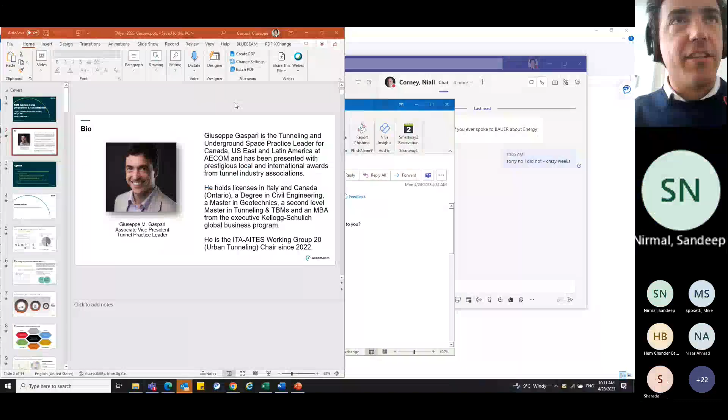This was a massive introduction. Thank you very much for it. But I hope I can live up to what you said. Thanks a lot for the invite. I'm always happy every year to come back to India digitally. I spent 5 years of my life between Bangalore, Delhi, and Mumbai, so India stays in my heart all the time.

So let's get started. Today I want to try to identify some of the case histories that apply best to some of the recent work we're doing in the International Tunneling Association around the value proposition of TBM tunnels and their sustainability aspects.

Let me try to go into presentation mode and confirm if you can see the full screen. Let me minimize this. So you already introduced myself.

Let's not waste time. The agenda for today, I hope I can cover it all, starts from an understanding of the value proposition of tunneling. We will work into some thematic case histories, in particular facing geological and geotechnical challenges, which is always the first point. We will look at examples of how to mitigate impact on existing structures, existing and future solutions about break-in and break-out, and then some unforeseen accidents that I'd like to show.

So please do not record. Oh no, you're recording this meeting? Yes sir, but it's okay.

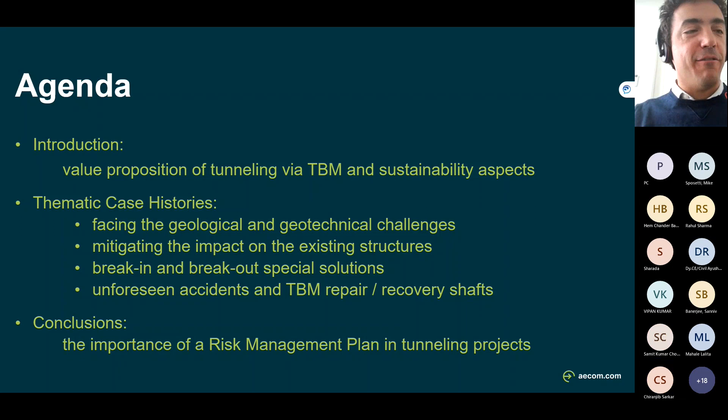Recording is on, I'll moderate my language then. This video will also be available on the YouTube channel. No problem, that's fantastic, thank you for confirming that. It's always good to learn about those experiences.

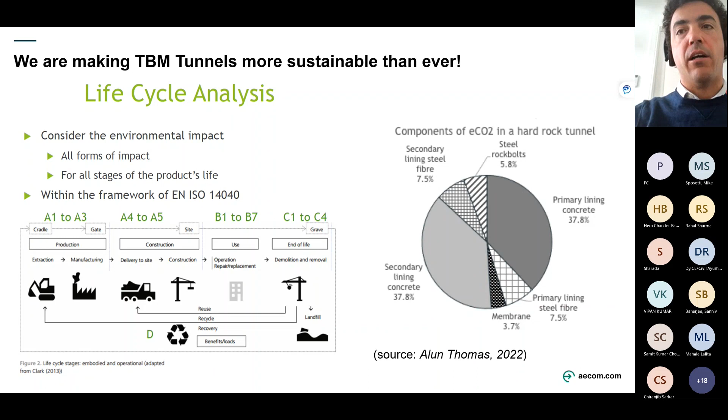In general, there have been studies and reports, some by Alun Thomas presented last year as part of our International Tunneling Association World Tunnel Congress, that look at the life cycle analysis for the sustainability of TBM tunnels. The good news is there's a lot of action going on, particularly between production and construction, to reduce the carbon footprint of materials and operations in our tunnels. As you may notice, concrete, either secondary or primary lining, is the biggest element introducing carbon issues in our project, and acting on that is our target to try to reduce the carbon footprint of our tunnels.

As a kind of test run in Working Group 20, together with the ITA Tech committee, we have taken the studies from Alun Thomas and moved to a group currently analyzing the impact of adjusting the design of some of our tunnels to reduce the impact of concrete using different types of fibers. You may notice the concrete is still the biggest element, but if you start moving from rebar to steel fibers to microsynthetic fibers, you may obtain a reduction of the overall carbon footprint and even an increase of durability.

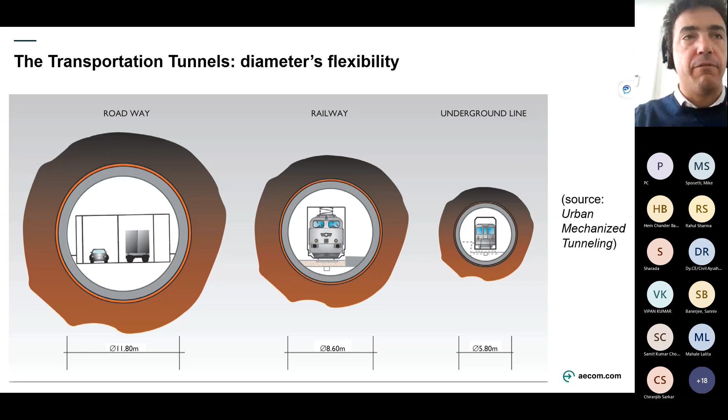Now, the next target is to try to reduce the concrete amount itself, and there are some design solutions that can help with this. In terms of value proposition, tunnels host several elements - roadways, railways, or underground lines - different diameters for different types of use. That is pretty well known.

But what is currently not well framed is the risk matrix around the overall lifetime of those tunnels. I try to identify here some developing frameworks from organization and governance, which establish the planning of a tunnel, into the procurement through supplier versus buyer power, and then the economical impact of those projects that sometimes can be delayed, leading to escalations, and sometimes may have side issues or unforeseen risks dealing with contingency. Finally, the aspect we usually work more on is execution - investigation, design, and construction itself.

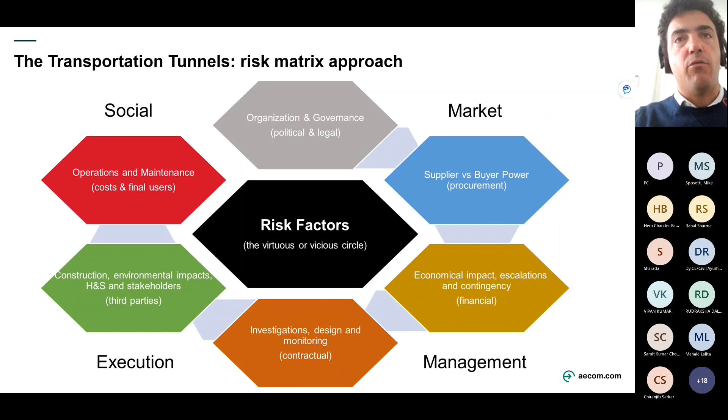And finally, the operation and maintenance. So if you try to frame your project within those different phases, and at the same time those macro areas - I divided it into 4 corners: market, management, execution, and social aspects - you may actually have a better organization of the overall risks and opportunities to consider when working on a tunneling project.

Moving into some interesting examples, one developed years ago in Canada is this Southeast Collector. A thorough study in 2003 was already conducted as part of the environmental assessment on the carbon footprint of those tunnels.

Particularly, what was calculated is not only the negative impact of construction, but also the positive impact that may rebalance the carbon footprint through the advantages of better dealing with all the CSO water in this area. So it's quite interesting to always consider those elements in a holistic approach.

In that case, a comparison between different cost items was run, along with identification of the solution that was faster and cheaper, while also considering less environmental impact. So you may notice here an open cut or cut and cover compared with TBM tunneling.

TBM tunneling was preferred at the end of the game, not only because it represented a less risky construction method at some locations, particularly where we got to underpass highways or railways, but particularly due to considerations of less environmental impact. As we all know, an open cut may be more dangerous also for the local environment.

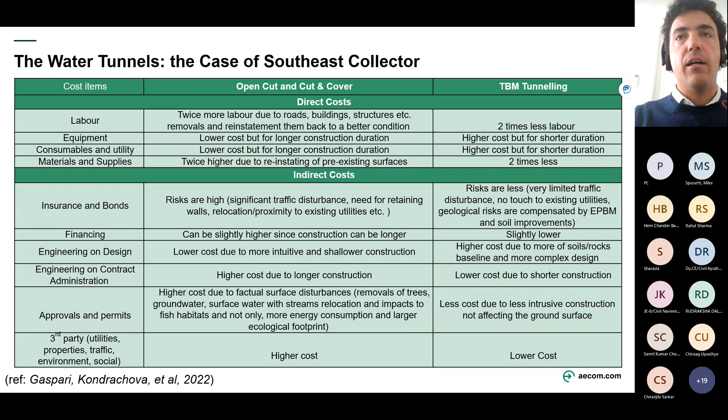So this is just an example, but I want to start focusing more on the typical aspect of the geological and geotechnical challenges. I want to stay in Toronto, and in York region here in Canada, where another project is currently under tendering - the West Vaughan Sewage Servicing project.

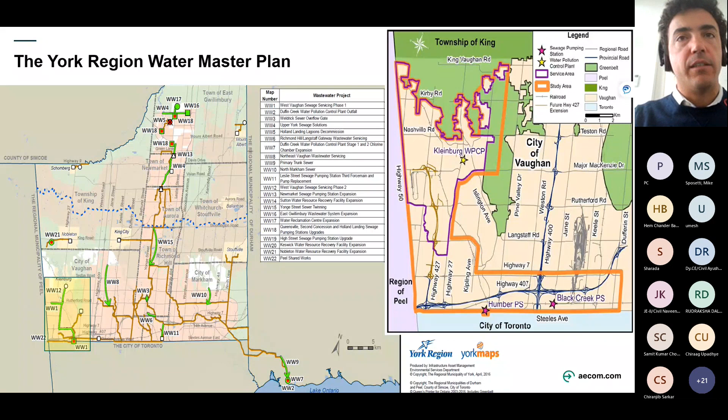These are all presentations from York region, and I pay credit to them. They presented an interesting study to optimize a concept alignment and concept design, including open cuts and micro tunneling, moving these into larger TBM tunneling to try to both reduce the number of compounds, the social disruption they represented, and the number of shafts that would have actually increased the environmental risks overall.

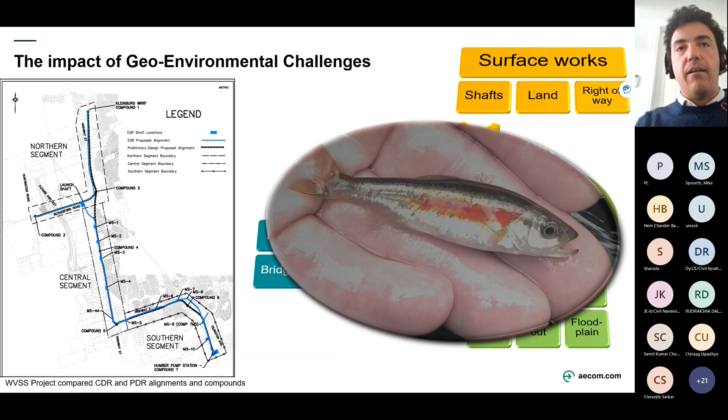And this is a typical little fish, the redside dace, that was found in the local rivers - a species at risk that needed to be protected. By reducing the surface impact of the project and moving more into tunneling, better preservation of this species was achieved.

Definitely one important impact is the procurement method. When we move from a prescriptive design to a performance-based design, we always have to consider that we progressively increase the complexity, the number of stakeholders and interactions, but at the same time we also increase the risk transfer from owners to contractors, allowing simplified construction management, involvement of new technologies, and really letting the contractor express themselves with their consultants and engineers to deliver what they're best at delivering.

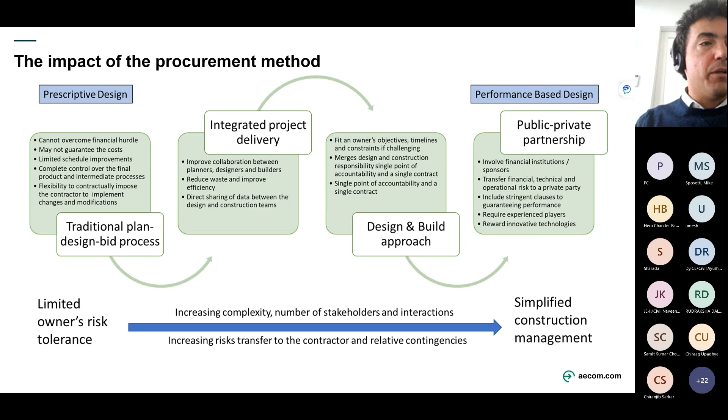So I do believe this is another important factor when we evaluate tunneling projects, because not only the technical aspect but also the commercial aspects need to be considered to allow those new technologies - for example, those carbon footprint reduced materials - to be implemented.

And the example of the West Vaughan is a good one, because again, in this case, different types of TBMs were adopted, and a number of maintenance shafts were considered. Now, this may not be the final solution that will be used - this was an old presentation given to the Tunneling Association of Canada.

The organization of the contract and preliminary identification of TBMs to excavate in rock versus soil, shown respectively in red and blue, helped identify disconnecting shafts from one construction solution to another. The geological risks were different in soil and rock: rock masses were characterized by potentially swelling shale, while the glacial tills in soil may have sandy pockets, gravel, and boulders representing a hazard for effective TBM tunneling.

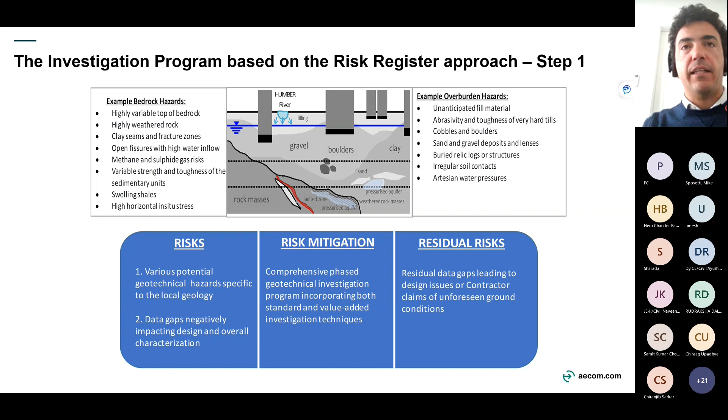Not only do you have to collect the potential hazards in tunneling, but you have to understand what those hazards cause in terms of impact on your construction methodology. In this case, loose grounds, erratic boulders, and high geovariability led us to think that a mixed face condition could be a challenge for tunneling.

That's why a closed mode TBM was preferred. This was also the conclusion due to potential larger water inflows from pressurized aquifers or local peat and swamps, and for resolving, through introduction of potential slurry, the isostatic readjustment, glaciotectonic processes, and faulting that could create sticky behavior in the extracted material.

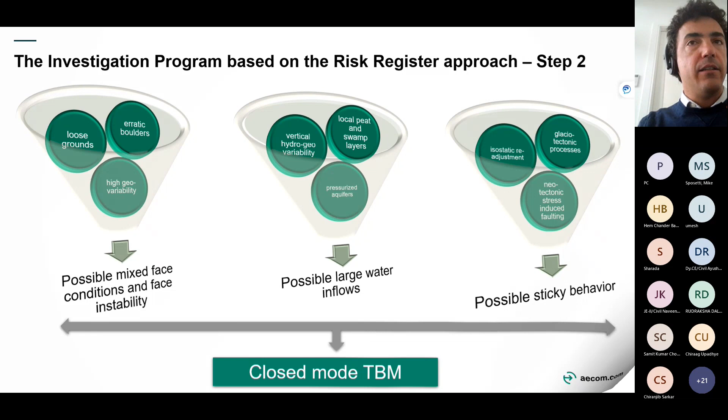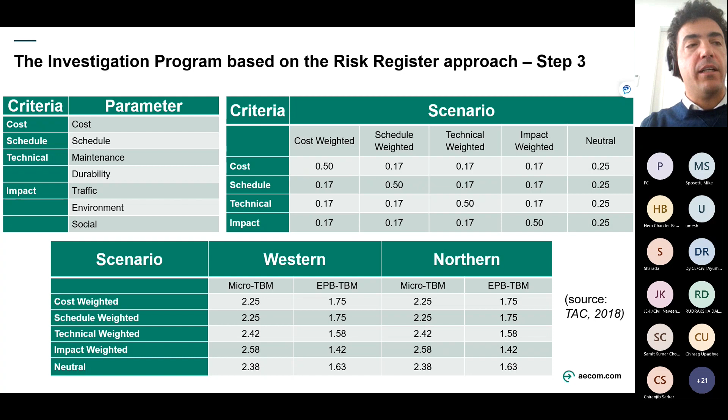The risk register included all of that and concluded that TBM tunneling was favorable with respect to micro tunneling, which may increase the number of shafts per tier at certain locations that were challenging for environmental aspects.

The key point achieved was to organize the project with an increasing amount of geotechnical information to provide an initial geotechnical reference model, which would progressively improve as phases of geotechnical investigations proceeded. With this improved model, a definition of TBM specs as well as the GDR could be lined out.

There is always a limit to the additional advantage gained by increasing the number of geotechnical investigations. That's why I always remind people to be careful about where we improve our phase 2 and phase 3 geotechnical investigations, to make sure we have the right inputs needed for our design.

This was the final resolution of our risks. Through a risk register, we quantified risks that were at an unacceptable level and needed mitigation, and risks that were already at an acceptable level, so we didn't need to mitigate them.

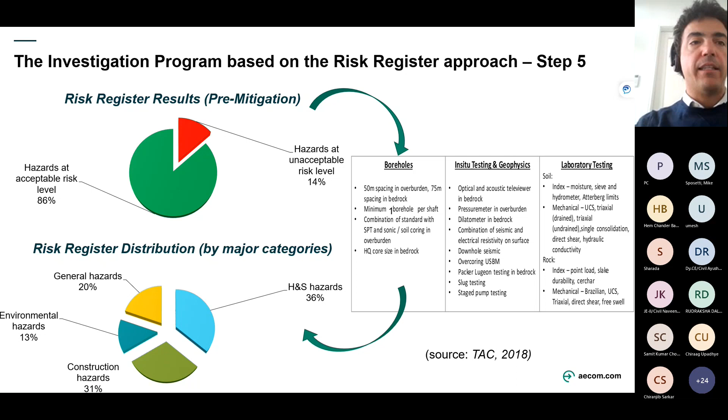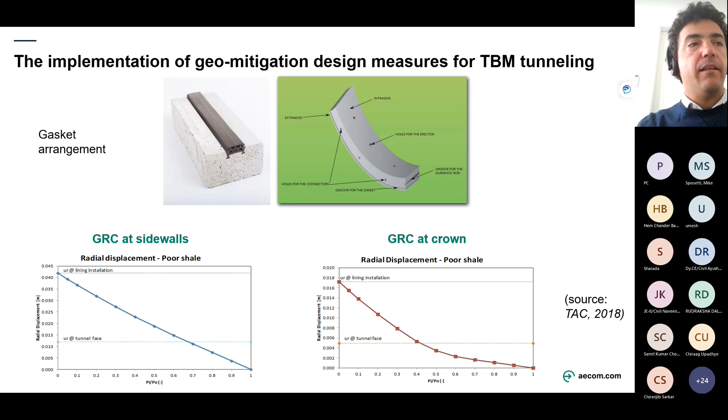Mitigations were of different strategies and types according to the category of hazard. Health and safety hazards were dealt with differently than environmental or construction ones. Some potential mitigations included adoption of new technologies such as the gasket arrangement, you notice here the embedded gasket in the segmental lining, but also analysis of ground reaction curve impact at the sidewalls versus the crown, inducing potential differential movement within the rings and segments.

You may notice that shale may swell, but can also be impacted by subhorizontal layers of limestone that create localized additional stiffness, affecting not only tunnel construction but also segmental lining installation and stability, for which you need circumferential joints and longitudinal connections through bolts.

In this case, longitudinal connection with bolts was excluded and substituted with typical guiding rods, because in a lot of recent local projects it's been identified that swelling doesn't happen quickly during machine excavation but then has slow progression over time. So installation would not be affected, and guiding rods were enough to guarantee perfect installation.

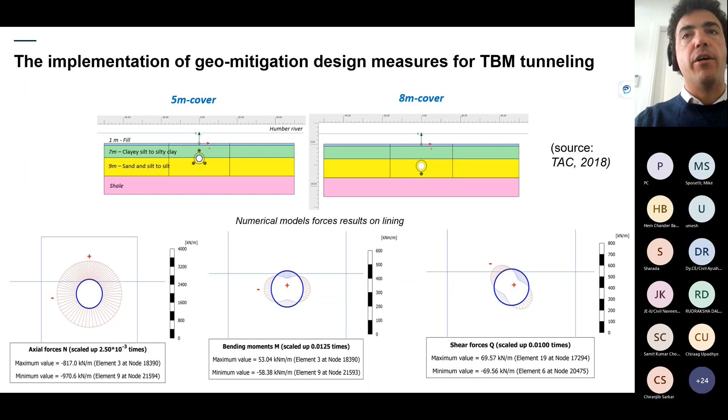At some other locations, geomitigations considered using ground improvement, or even deepening the alignment to avoid the risk of water inflows. As you may notice, under a river we had 5 meters of cover, which was increased to 8 meters to allow for extra safety and reduce the risk of frac-out on the surface.

Not only design solutions, but also construction methodology and definition of construction sequences can help mitigate risks and increase the interest of using TBM tunnels versus cut and cover or open cut approaches. In this case, different options were studied, and the final definition will be left to the contractor, but the initial study acknowledged the efficiency of starting from shaft number 7 excavating to shaft number 6, and using shafts number 5 and 2 as launching points compared to other solutions shown here.

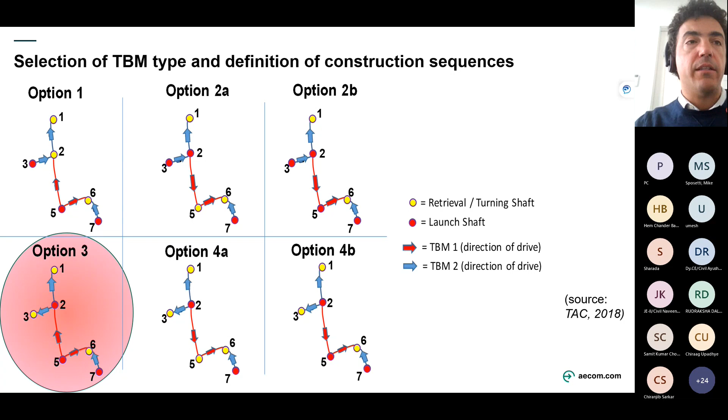Another example that is quite interesting is an old study done for Spasskaya, a station in the middle of St. Petersburg. You may notice here an intersection of subways that were not properly efficient in terms of allowing people to get in and out.

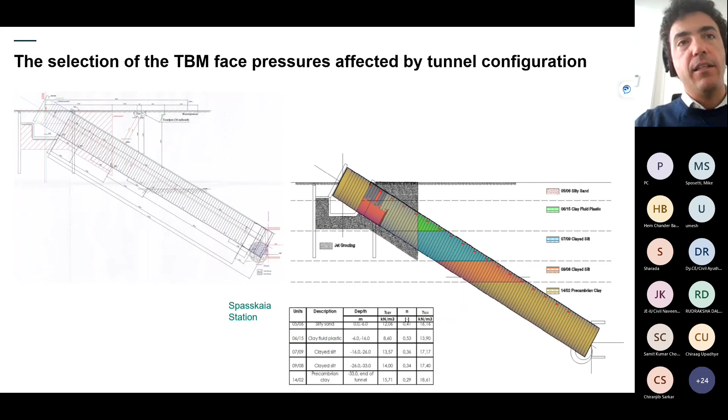An additional shaft to create an additional entrance was planned in a very dense urbanized environment. A block was torn down, as you notice on the right picture, and then inclined tunnels were supposed to connect to the station under the streets instead. This reduced the social disruption due to utilities and traffic rearrangements during construction, but triggered complicated design for the inclined tunnel.

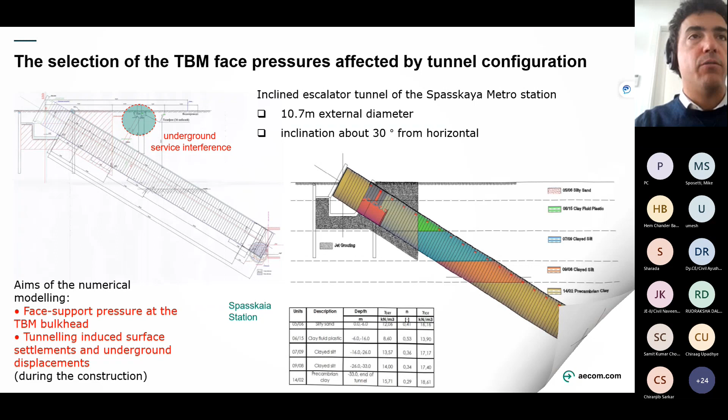The face support pressure at a TBM bulkhead and the tunneling-induced settlements were properly calibrated to understand the impact on underground services and reduce the relocation of the utilities. You see here the study done through 3D modeling in FLAC that considered the presence of a TBM shield, the face support pressure on the front, the injection pressure in the back, and then the installation of the segmental lining in red.

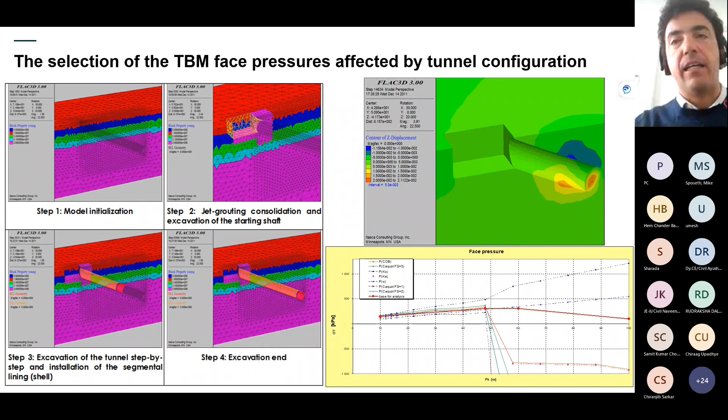You may notice that a series of ground consolidations were necessary to allow for stabilization of the initial excavation steps from the launching shaft. The face pressure was calibrated by studying different analytical solutions, as you see below. However, the numerical modeling, as you notice here, was the one that gave us the real decision over what type of face pressure to apply.

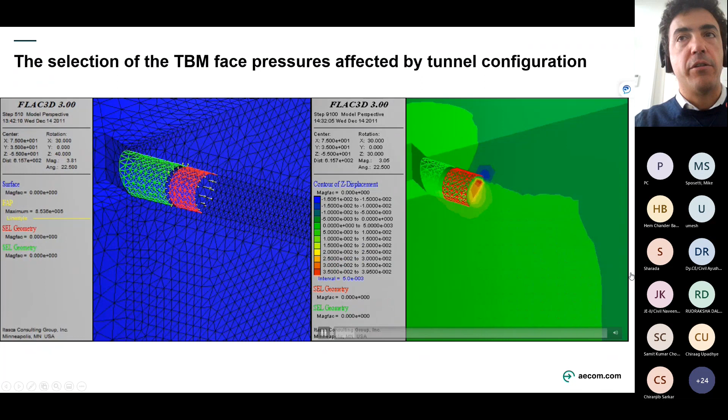As you see, this is a very old FLAC model. Now resolution is much better in the new models. But it was quite interesting to notice that due to the geological stratification, and due to the fact that at deeper conditions you may have higher stresses, we increased the displacement.

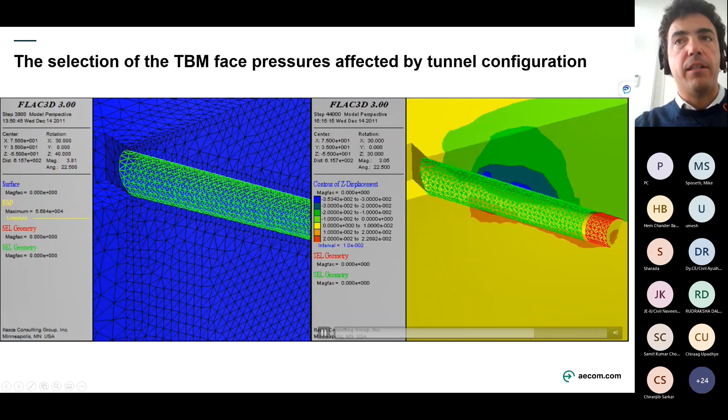You see the blues and the reds in the right-hand images. But then after a certain depth, due to the different type of geology and the higher in situ stresses, we stabilized the deformations, and actually they started reducing a lot. Consequently, face pressures needed to adapt to avoid that excessive face pressures may have caused heave on the top.

If you increase the face pressures as you go down, thinking that the more water, the more soil pressure, the more you have to push your face pressure ahead of your cutter head, well, you're probably making a mistake. In fact, instead of doing the blue arrangement here, we decided to push with the red one, reducing progressively the face pressures as we went deeper.

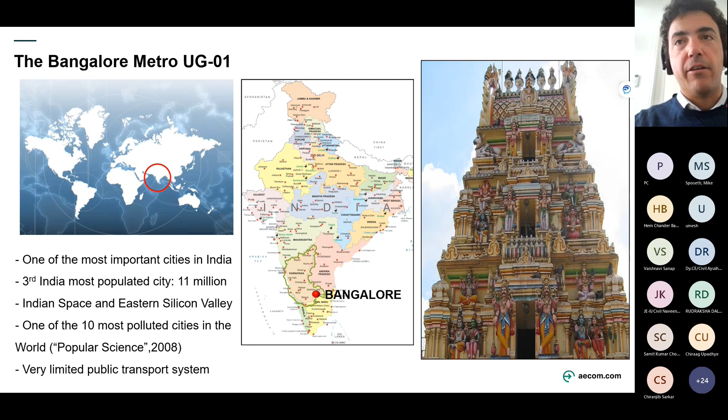Let's move into another type of mitigation now, which is reducing the impact on existing structures. This is a case that comes from the Bangalore Metro. I don't have to describe where Bangalore is, but it was the garden city, the green city, so we got a lot of protests when we had to cut down some trees.

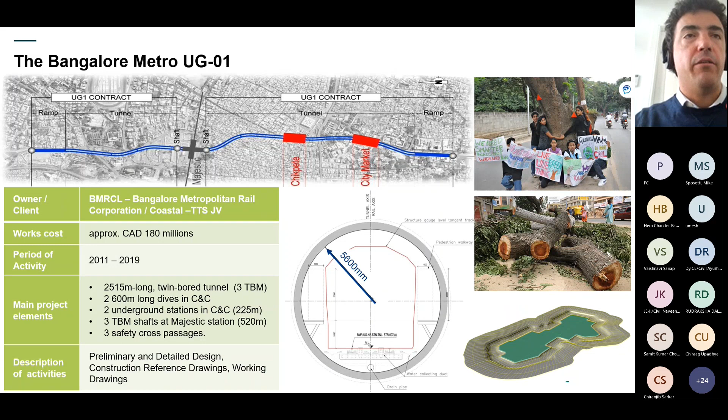I agreed with some of the protesters at one point, and we tried to reduce the number of trees to be cut. But that's just to give you an idea of how socially sensitive the city downtown was, as we were building 3 new stations and 6 kilometers of tunnels underground there.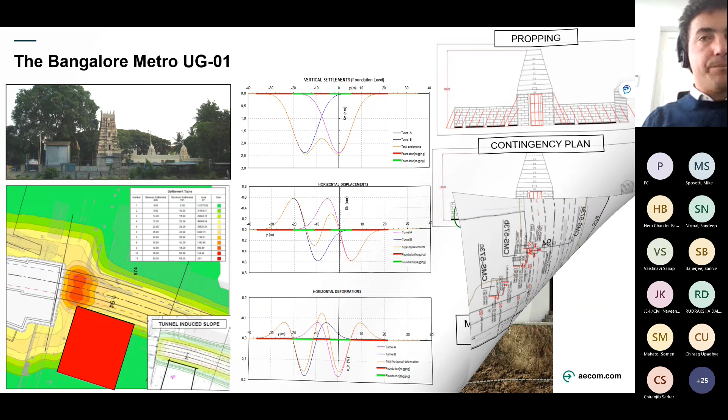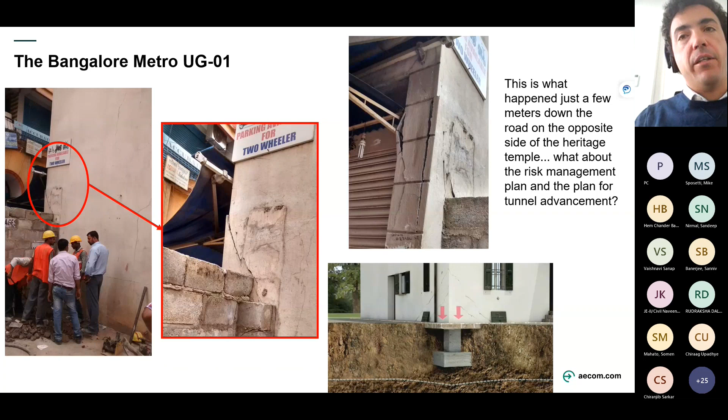This is where the temple was located. While we were caring a lot about the temple, on the other side of the streets, we started looking at some cracks. But sometimes it's difficult to understand if those cracks are induced by your tunnel solution or if they are readjustment of the foundation system, like in this case. So through studying of the pressures and injections on the face, we were able to identify that there was no connection with our TBM tunneling there.

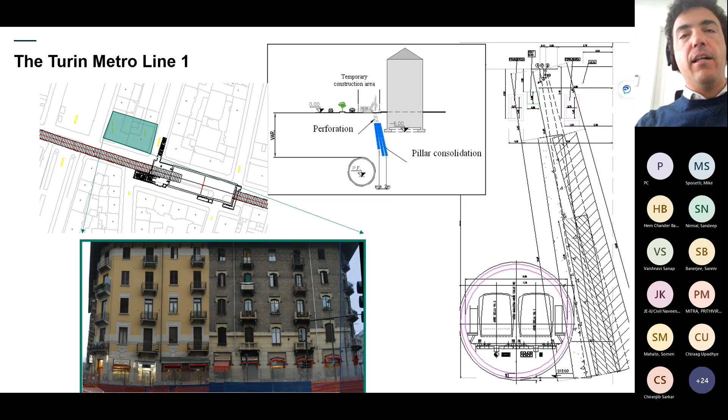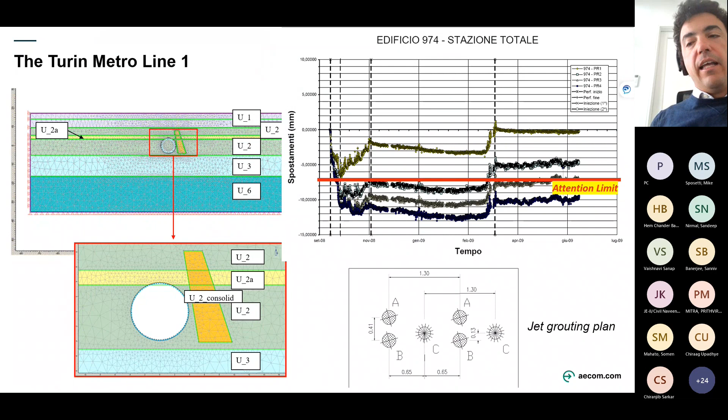Another problem that I want to show you was to understand how much your mitigation measures are really helping you and how much instead they may create more damage. This is an old case for the Turin Metro, where perforations due to a pillar consolidation to reduce the settlements induced by this single bore tunnel on an existing building that you see below were actually proven to be the cause of some extra settlements on the building itself. And this was done through back analysis, modeling that jet grouting consolidation, and identifying that actually the attention limit would have never been reached by the tunneling itself.

There was no way whatsoever that we could have reproduced with existing available theories the very strange profile that you see on the bottom left corner here of deformations that were obtained. So some analyses were conducted to study and combine the tunnel induced settlements with the induced settlements from the drilling and injection of the grouting.

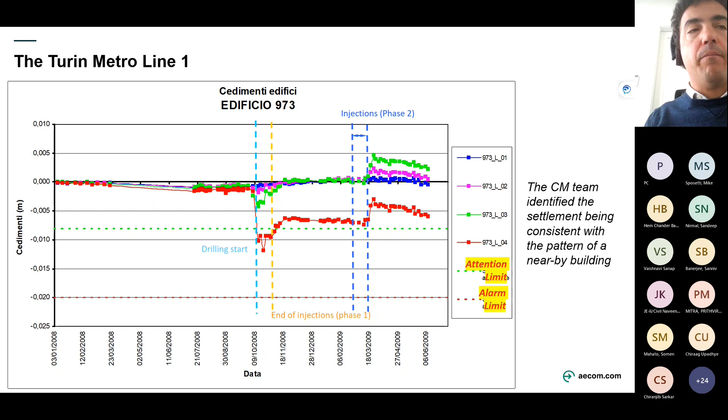As you may notice here, if you look at the red monitoring data, once additional injections were caused, a consequent heave was obtained and a resolution of the extra settlements was achieved, confirming one more time how important was the fact that proper injections were achieved. A reduction of the deformation during the drilling of the grouting solution would have actually avoided that extra settlements and cracks development on the building.

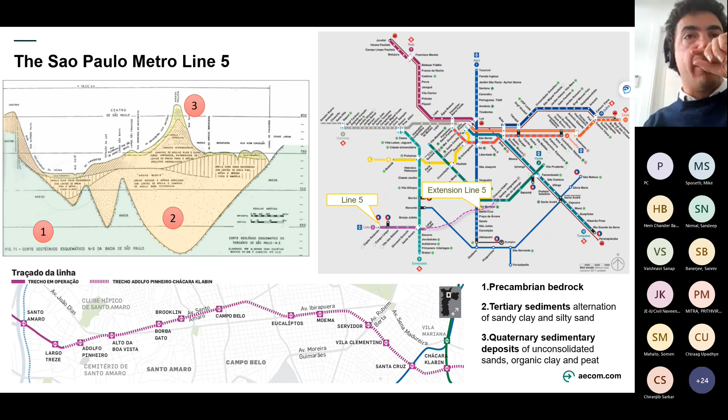Finally, an example on the São Paulo Metro here, which was a very important project run by the company that I was working for before. This is also an old publication that was run by the company. Different types of soils were encountered at different locations, including tertiary sediments and Precambrian bedrock.

Different methodologies were used, such as top-down and bottom-up methodologies. But what is interesting here is actually the intersection with the existing stations and how this was achieved through the use of TBM tunneling underground. You may notice here, this publication from the company at the time was called Geodata Engineering. That's the one that worked on these projects, and currently in the market under the name of Pini.

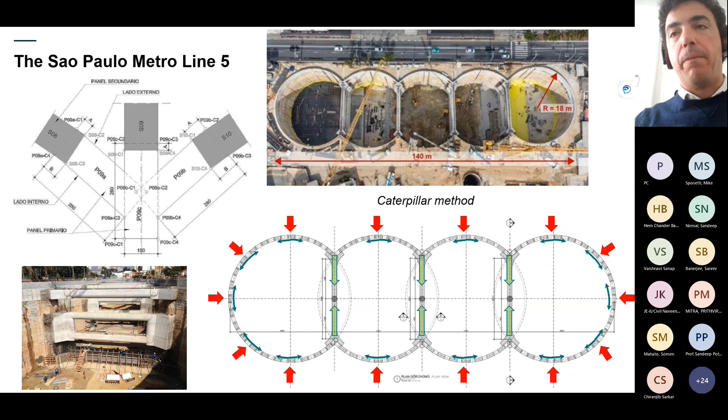The idea that they developed was the one of using these 3D intersections, and actually the use of these secant circular shafts intersecting with each other, with those large beams that were supposed to take into account the compression that was coming out of this arch effect and transform it into a very symmetric equilibrium condition for the structural loads.

Now, one of the most risky situations that we need to deal with are actually the break-in and the breakout. I want to look at here at some of these solutions. This is a slide that comes from our colleague, Engineer Della Valle, who very clearly identifies here what are the different risks of breaking in, so basically launching a TBM.

To be more clear, when the TBM starts from a station box and starts excavating, you may notice that there are a number of risks for water to come in, because the ring is not yet installed in the soil, so you cannot actually grout between the ring and the soil, and you have no guarantee that water inflow doesn't happen. That's why you usually need a jet grouting block on the left-hand side, or you need into the station box a sealant ring, or maybe a combination of the two.

On the right-hand side, when you have a breakout, so when the TBM comes into the station box, similar risks of water inflow exist and a similar solution is applied of having a jet grouting block on the other end, as it is confining and reducing the risk of water getting in. The jet grouting block is usually the length of the ring plus a couple of the length of the shield plus a couple of rings, so to make sure that you have enough of the grout that you see in brown here injected behind your rings.

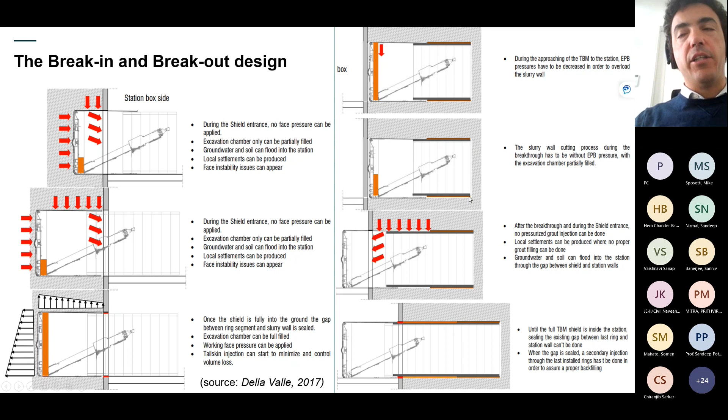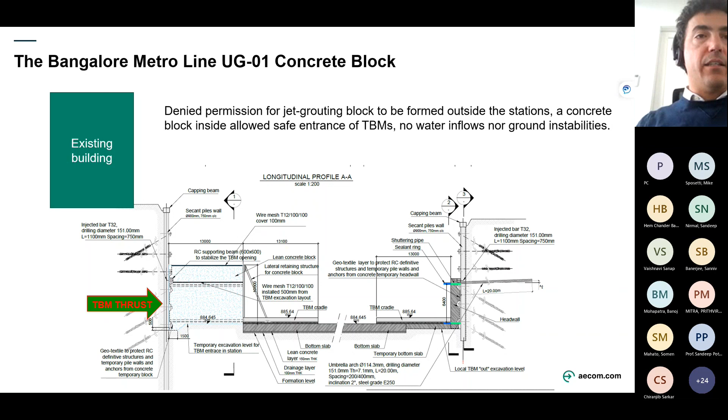So in this case, we use this solution again, as I mentioned before, TBM shield and 2 rings in length. The TBM would have come into the station from this direction. We had calculated the TBM thrust breaking into the station, and then the risk for the block to move away.

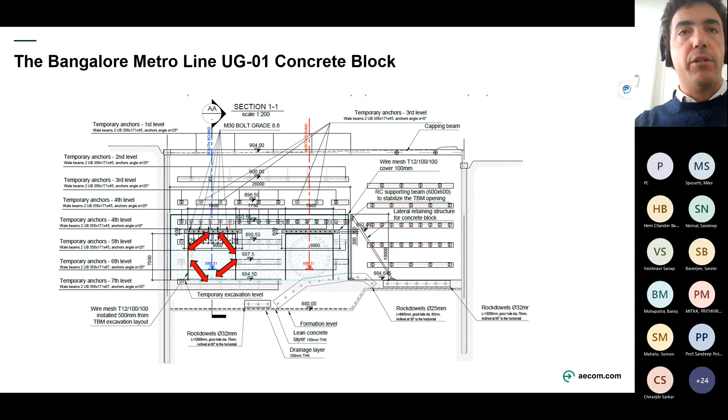Another loading condition we consider is the water around the shield of the machine when the shield is in the block. This water is hydrostatic, with pressure in all directions, and will induce some tension, as you see here, into the block, and consequently it needed to be reinforced, as you see by those black lines, which are wire meshes. So the block was executed into the station while the station was excavated to prepare for the TBM arrival.

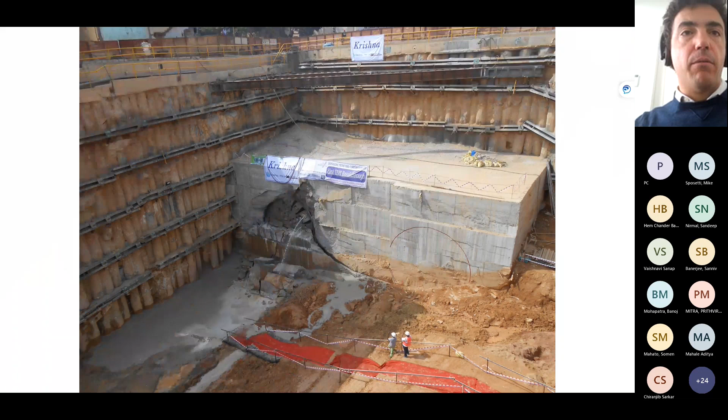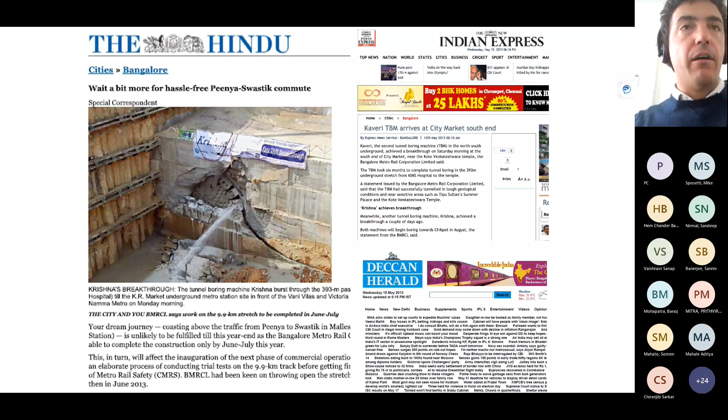When the block was completed, the first TBM on the left-hand side started pushing into the block. You see some water coming out. That's the water that was trapped in the block. But luckily the water at one point stopped as the machine broke through, and no additional water came through because that block was long enough to allow for sufficient length, and there were 2 rings with a bi-component grout injected around to guarantee full water tightness.

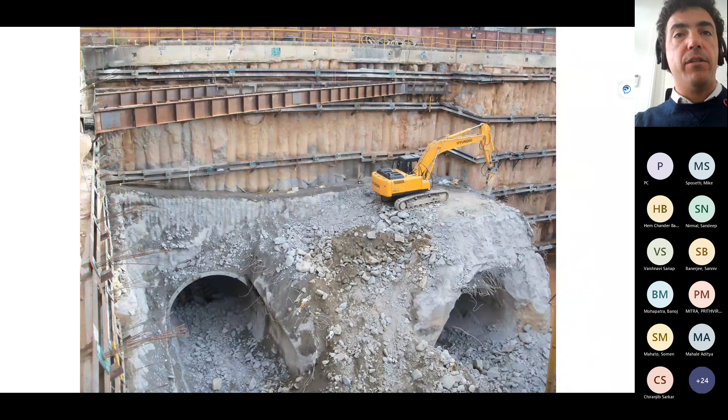Newspapers were happy about that, and then the second TBM also broke through nearby. So that's an interesting solution to allow you to break into a station when you don't have the opportunity for a jet grouting block outside of the station. The only problem is that then you have to demolish all of this amount of concrete. And as I said at the beginning, concrete has the highest carbon footprint.

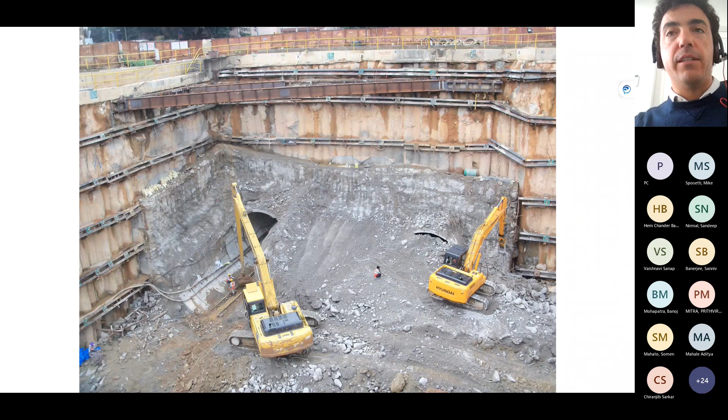So I'm not definitely in favor of this being the right solution if you have an alternative to that. Also, the concrete has to be a low resistance one. In this case they didn't use a low resistance concrete, so it took a bit more time to demolish the whole block. But then it was done, and finally the station was completed.

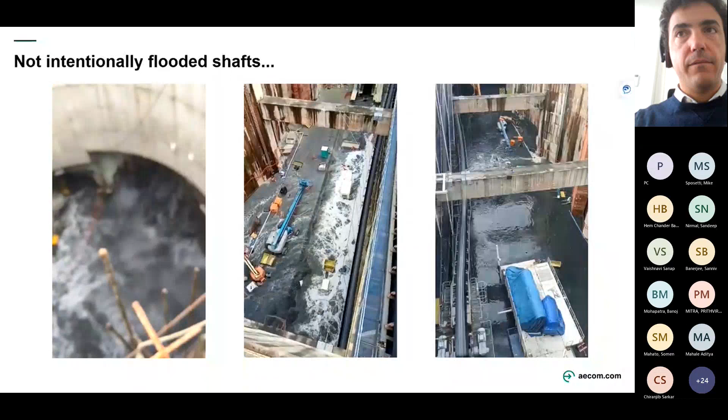These were videos coming from a project in Brazil. That was not intentional, definitely. That's probably not even caused by water in the soil, definitely not - there was no water in the soil. That was caused by a damaged sewer in the vicinity of the station there.

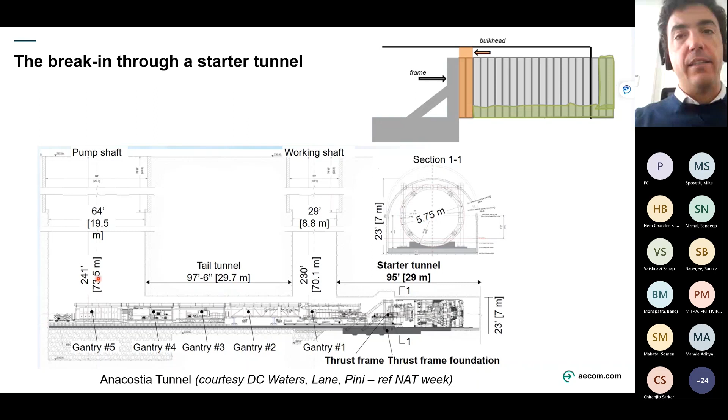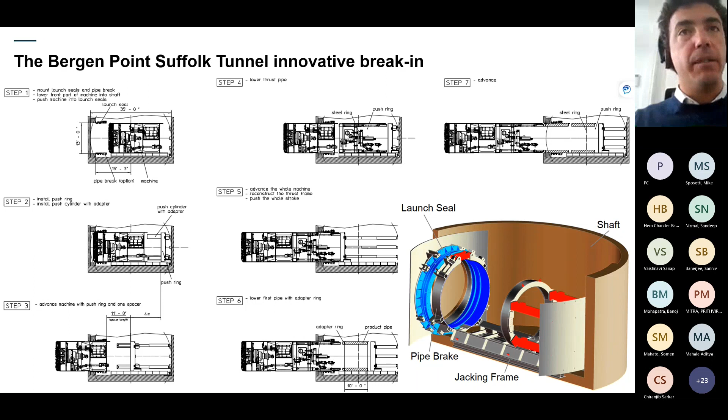Now the break-in through a starter tunnel is an interesting solution. This one, also in DC Water, again designed by Pini, is an interesting reference that has been published a few years ago. But also the Bergen Point one was developed by Sally together with Posillico and their engineering consulting firms - an idea to put together a segmental lining with a conventional jacking frame that you would use on a micro tunneling. It was pretty large, but still possible - 3 meters in diameter.

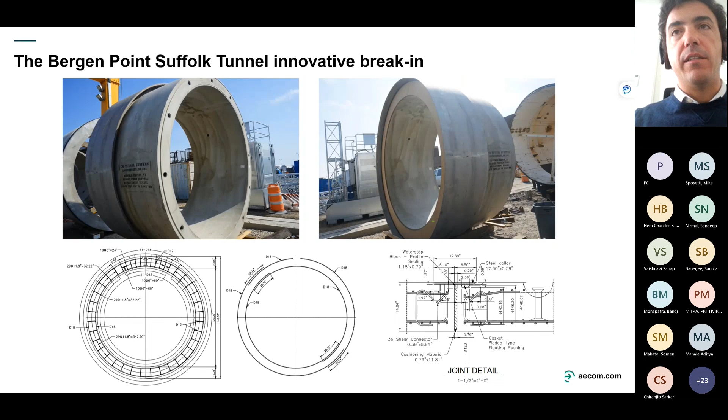The interesting point was that you needed to design a transition piece between the segmental lining and the precast pipe lining, and that was where the designers were challenged. As you may notice, 3D numerical modeling was adopted to design it. But what is interesting is actually the technology here and the way the machine was designed to install the segmental lining, but also to be pushed in. Very smart idea and very interesting solution for a safe break-in.

In Roma, a few years ago for the Metro C, Herrenknecht developed this special cap that allowed protection from water inflows, and now many other companies can provide a similar solution. It's kind of a real cap - there is a pressure release pipe at the bottom that allows you to reduce the pressure as the machine comes in. Once you release the whole pressure and inject grout behind to completely seal the machine, it's a good solution to limit the amount of grout that you have to use.

And grout is cement, as I said at the beginning - that is where we get the most carbon footprint of our projects.

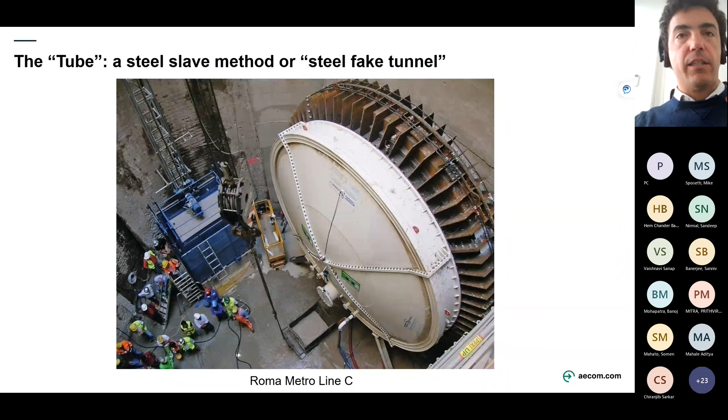Other ideas come from Paris, from an Eiffage project in which they enlarge that cap to host the whole shield. It's kind of the concrete block I showed before, but in this case made of steel, and may reduce the whole carbon footprint if the steel can be reused.

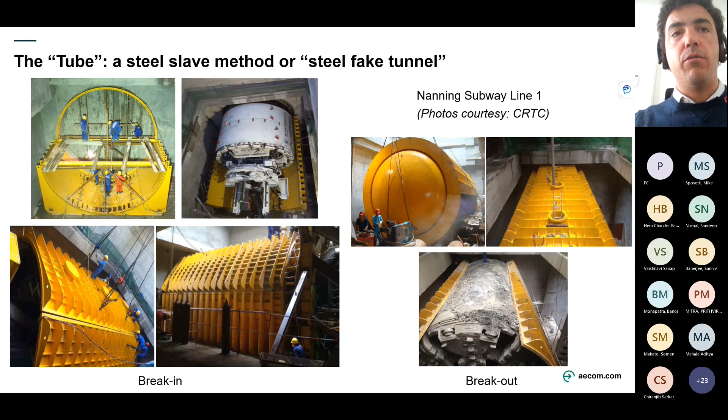It's not a new idea. It was already done in China. This is from CRTC, one of the projects in China, both break-in and break-out.

An interesting new solution done in Singapore in the DTSS tunnel from Leighton and Octave is, instead of pushing the machine through a pushing frame as it starts, to pull it with a flying launch solution, using cables that pull the machine against the support of excavation and against the soil. It proved quite efficient, particularly when space is limited and you cannot push against the other side of the shaft.

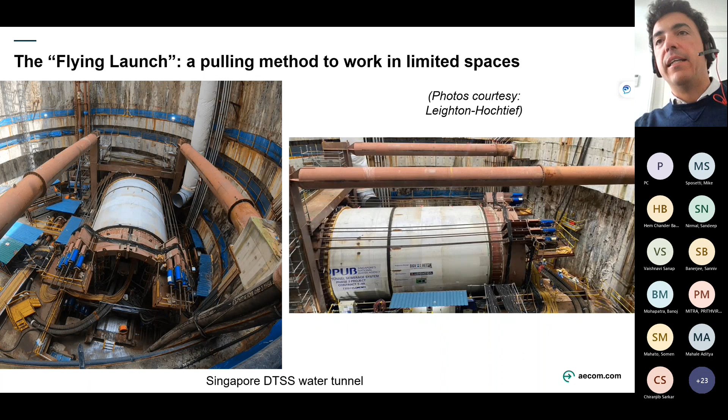Do we have time for some unforeseen accidents? Actually, a couple of minutes. Let me at least show you the first one, on the Brenner, and then I want to give space for questions. I don't think we have time to look at everything here.

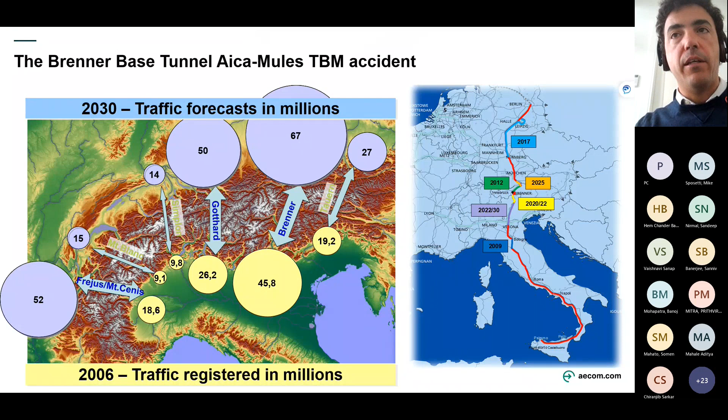The Brenner Base Tunnel connects Europe north to south between Austria and Italy. What was interesting here is that an exploratory tunnel between the two main tunnels was designed.

The exploratory tunnel was designed to provide geological and geotechnical information in very uncertain geology. As you know, we are under the Alps, sometimes with more than 1,000 meters of rock above, and it's not easy to conduct an extensive geotechnical campaign, particularly not easy to drill boreholes.

That's why the exploratory tunnel was really a long borehole underneath the two future tunnels. It was useful because in the long term it will be adopted as a safety exit and also as a service tunnel for cables and services to move from one side of the Alps to the other.

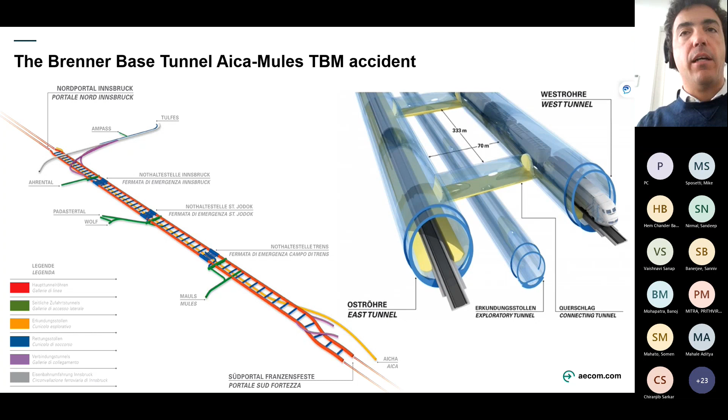The section I worked on, which was quite interesting, was the one close to the Italian border in Fortezza. The exploratory tunnel ran through the granite of Bressanone, just south of the Periadriatic Fault. You can notice here the configuration of the mountains, the portal in Aica, and the whole excavation.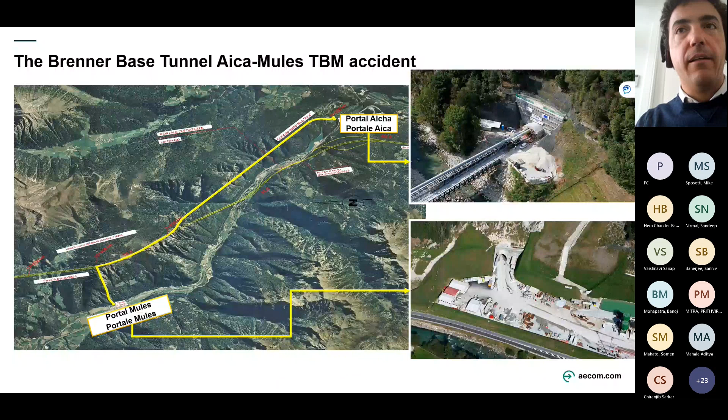This was another interesting project run by Pizzarotti as general contractor, with SELI managing the machine and the team inside the tunnel. The diameter of the tunnel was 6.35 meters, quite large for an exploratory tunnel, but that's because it was also meant for future use.

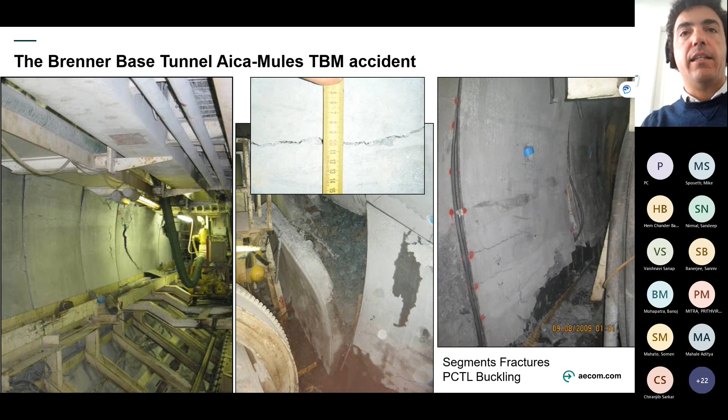One of the accidents that happened here was a series of cracks developing on the sidewall. There was no problem in either the design or the construction, because everything was run as per standard—the geology wasn't showing anything particular in this location.

When further investigations were done, after the tunnel face and the opposite side were stable, in a very strong granite, the movements were still strong and even the base was moving a lot. The backup was strongly deformed, as you can notice here.

Those studies, through drilling and testing, revealed an interesting subparallel fault that was not initially identified during the geological analysis. The rock was pretty weak, with a very low RQD, as you may notice from this recovery here.

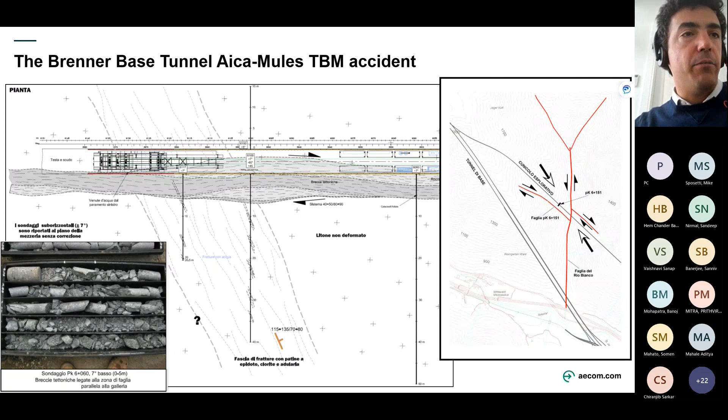It crashed completely. The lesson learned for me is, first of all, to always consider that there may be risks. I'm glad that both the owner and the contractor agreed on moving ahead with a fully shielded machine. Even though the granite could have been excavated by an open machine, being fully shielded was actually helping in terms of safety, because that accident would have caused a lot more problems with an open machine.

However, the machine never performed as well as before, as you may notice from some analyses I ran at the time I was doing my thesis on this tunnel. Even a double shield would have performed a lot better—these, on the right-hand side, are studies following research done by Grandori over the past few decades.

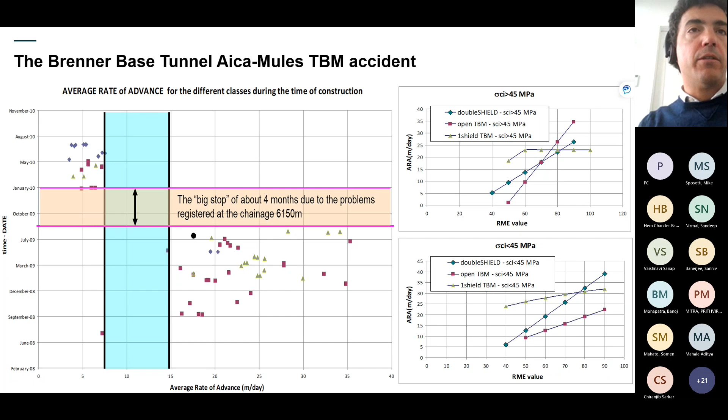Unfortunately, independently from the type of rock, the average rate of advance never reached the values that were possible before the big stop. So these were some of the results also in terms of the efficiency of the machine and the maintenances. There were a lot of extraordinary maintenances that were not done before the accident, and ordinary maintenance also took a lot more time.

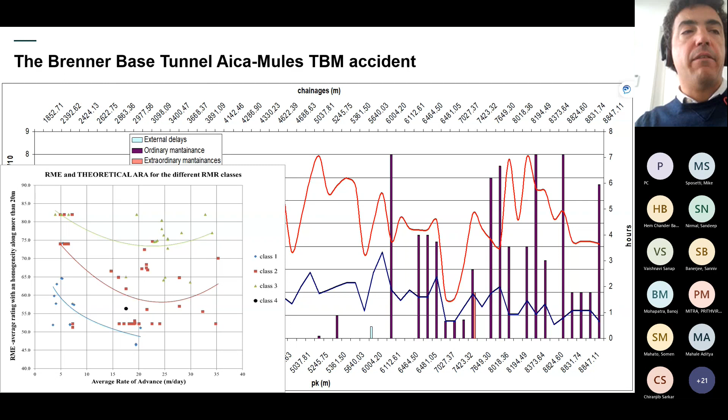Definitely an accident that created trouble to the possibility of maintaining the schedule. But again, it was an exploratory tunnel, so that was its purpose, to identify whatever was not possible to be detected from the outcrops. These were some of the analyses that I published some years ago related to the different classes of rock and the correlations with the RME from Bieniawski. It's an index that allows you to try to correlate the theoretical rate of advance with the quality of the rock excavability. But again, correlations were very weak because of those issues with the machine.

So let me stop here because there is a number of other things I may tell you, but I want to grab some of the questions before it's too late, and I don't see your faces, so I don't see if somebody's sleeping or not here. Why don't I stop sharing and I give this 10 minutes for questions.

Hello, can you hear me, Sarkar?

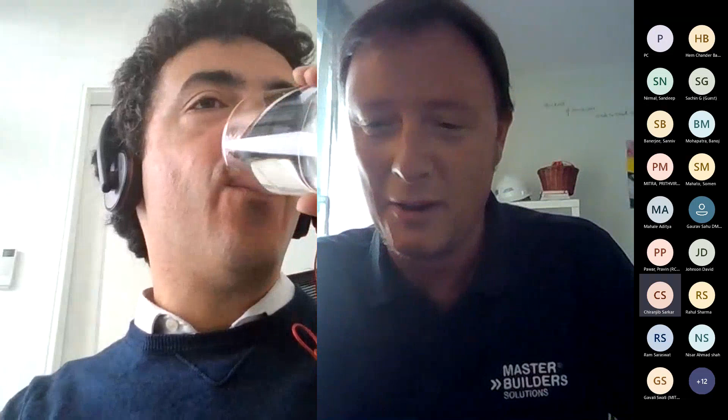Good afternoon, everyone, and good morning, Giuseppe. I would like to make you a question, but thank you for sharing what you have given to us, particularly interesting, the break-in and breakout design options for the TBM. In particular, I enjoyed the first project and the different working methodology options for the two TBMs from the three different charts, because it gives these young members the right opportunity to understand what is the entire design making process, the brainstorm from the design perspective to actually launch tender documents. But my question for you is on the carbon footprint reduction, because as we know, the ITA has launched an extensive campaign the last couple of years in reducing the CO2 carbon footprint emission in the tunneling industry. But I would like to hear your opinion on this, because much has been said, but in my personal opinion, not much has been done in a practical sense on the side. I would like to hear your voice, your opinion, what you think about this, the status of things on CO2 emission reduction. Thank you so much.

Thanks, Mike. That's a great question, actually, because it allows me to give some light over that initiative from ITA. I would kind of gently disagree that nothing has been done, because the industry, and you represent a good chunk of the industry as well, has been progressing with a lot of analysis, a lot of studies. ITA is trying to collect those studies and analysis and try to frame them within a universally accepted index for sustainability of underground structures that definitely needs to tap into the experience of our suppliers, our contractors, and our designers.

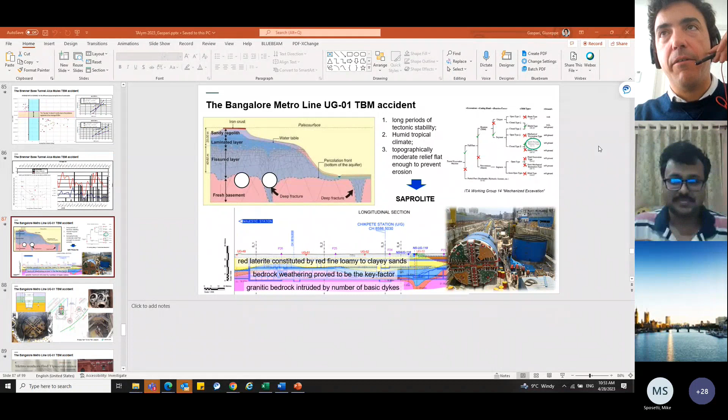Let me share my screen again. Oh my God, sorry, I was sharing only to myself. Oh, first, Nirmal, is there a question from him? As I share my screen, I think Sandeep also has one question. Sandeep, oh, Sandeep. Hi, Sandeep. Did it? Sandeep, do you have a question? Hi, oh, hi, Giuseppe. Yeah, hi.

I was just looking at one of the shaft options that you mentioned with the different rings coming together, and it looks a really nice solution where we can optimize the stresses. Was there any study done to compare how much benefit we get from this option with respect to a conventional rectangular box, in terms of materials used?

Yes, those studies were done. Unfortunately, I'm no longer working with the company that developed them. It was Geodata, and now it's called Pini. They've done those comparisons. I don't believe they've published that, so I cannot give you the numbers. I can only report on past projects through what was published already, as a matter of teaching, right? Because we're with young members here.

But they did a comparison, and it was extremely advantageous to move from a typical concrete rectangular shape to an arched shape. You can think about how much bending moment you reduce by transforming everything into an arch shape, and also in an interaction diagram, if you increase the compression you get into a much safer area, so you can allow for a lot more bending moment with the same amount of concrete. So you really make this concrete work much better. The problem we have with rectangular shapes is that like every beam, they have a very high bending moment and very small normal forces, so the concrete really doesn't perform so well.

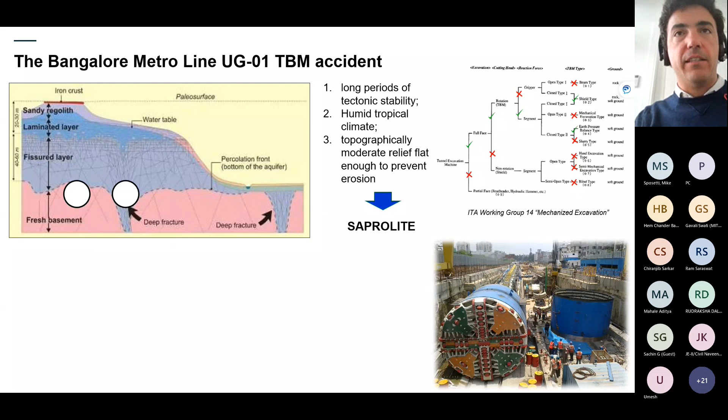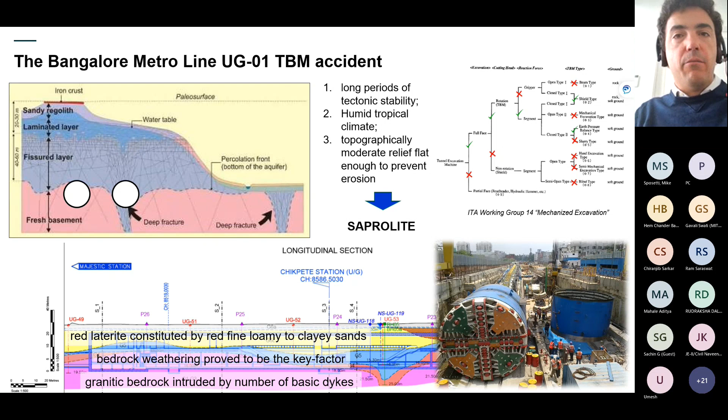So you have this very strong rock that through external agents has been progressively fractured, with water floods and high abrasive actions. So the bedrock weathering was really the key factor. This intermediate blue layer of mixed soil and rock, and then on the top you have a red laterite with fine loamy clay sands. But the TBM here was running across both, so it was very challenging to find the right configuration of the disc cutters, the right type of materials to be used, moving across between soil and rock.

And on the same line, I spoke about boulders causing this damage. There are also situations in which a station excavation was considerably delayed because we found an ancient cannon. You can see it here, now being hosted in a museum.

So not only natural obstructions, but man-made obstructions should be remembered. In this case, this was interesting because City Market station was built between the Tipu Palace and the Tipu Sultan Fort in Bangalore.

For those who have visited the city, these are two of the biggest attractions. We found out that the Sultan had built a tunnel in 1700, moving from his palace to his fort, because he had received some cannons and needed to move ammunition as the British were attacking. These were actually French-made cannons, because the French were against the British in the war and were supporting everyone against them. Sultan Tipu was against them too.

Unfortunately, that piece of history got lost. So when we studied the geology, we didn't have that story, and we only rebuilt it afterward as we found this cannon, and archaeologists came and helped us understand why it was in the middle of that land. It just reminds me of some additional risks we should consider.

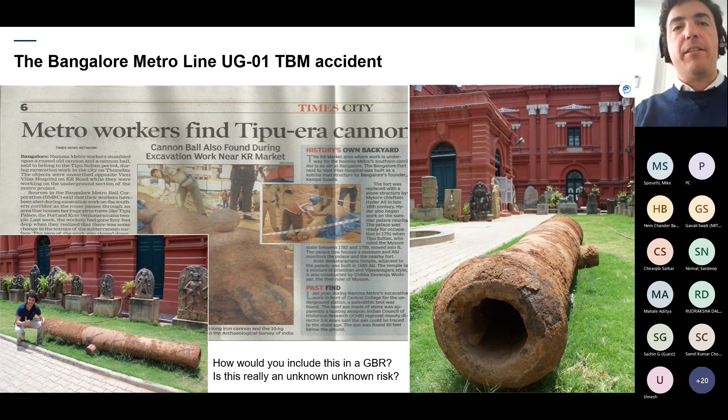So I think this could be a good slide to include. I don't have to speak more about this case history, so let me pull out conclusive slides that try to wrap up what I believe are the main lessons learned. Working in tunneling really simplifies that initial framework I gave on the risks. This case really showed the technology, contractual forms, materials, and geology being the major drivers, in my opinion, of the success or failure of a tunneling project.

Technology is critical. Our supply chain drives innovations every day and may greatly affect the time and schedule. The contractual forms, as I mentioned, the procurement method, how you engage the industry, how you distribute risk between owner and contractor, are essential, and they speak about the legal framework of a project.

The geology and geotechnics need to be known very well. I don't need to speak much about this because that's what we study, how to limit that type of risk in universities. And finally, the materials—not only the environmental carbon footprint, but also the direct cost.

How do we reduce them? How do we face the risk now of a very overloaded supply chain that still cannot keep up with the demand we have across the world? So look at how we can do things locally, how we can improve materials, how we can reduce transportation, and reuse what we excavate as much as we can.

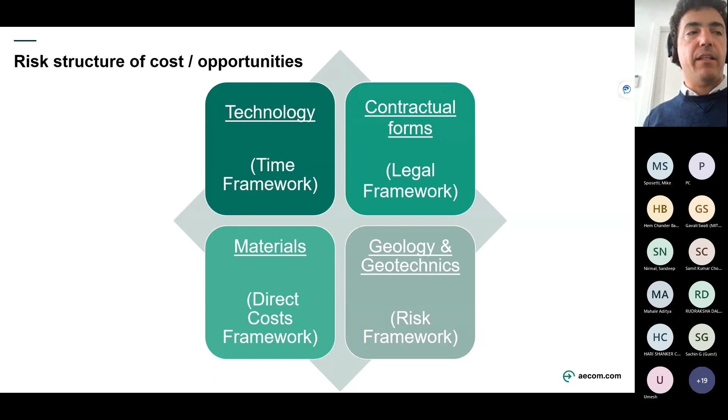That's it from my end. I hope this is an appropriate conclusion for today's discussion.

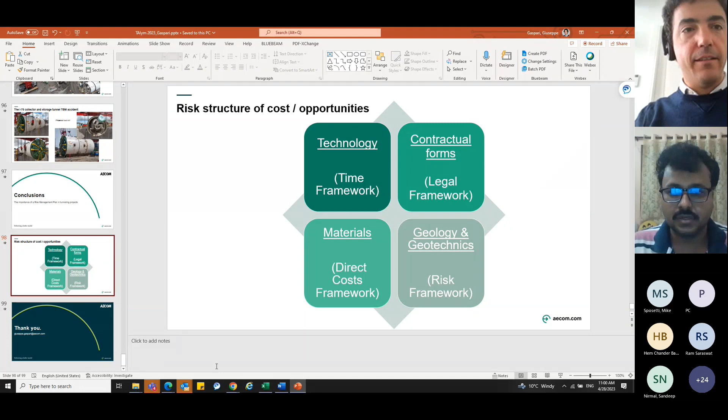Any other question? We can check for a minute. If anyone has any other question, you're muted, just raise your hand. Yeah, I think there is no other question.

Hello, am I audible now? I cannot hear you. I think there is no such question. If anyone has any question, please raise your hand. Can anyone hear what Mr. Gaspari is saying? Yes, we can, I think. Okay, sir, am I audible to you? I cannot hear. Mike, Sandeep, now I heard you before. Can you hear me? You can remove your headphones, sir. We can both hear you now. Yes, I see you guys are speaking. It's just me, yeah I think. Now you can hear me, sir.

Now I can hear you guys, apologies. That's okay. So I think, did you hear nothing of what I said up to now, or did you hear something? I think there is no such question. If anyone has a question, please raise your hand, just we'll wait a few seconds. But did you guys hear what I said about the Bangalore incident or not? Yeah, it's nice, sir. Okay, so it's just my audio was not working, yeah that's fine.